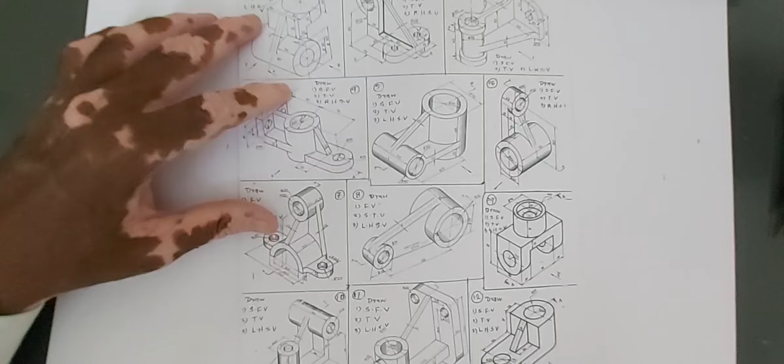Yes, today we will see this problem. This problem is mentioned in the book, so you can refer to the TechMax book or Techno book, Techno Knowledge book or Tech Knowledge publication book. This problem is available. So the question is: draw the sectional front view looking from X.

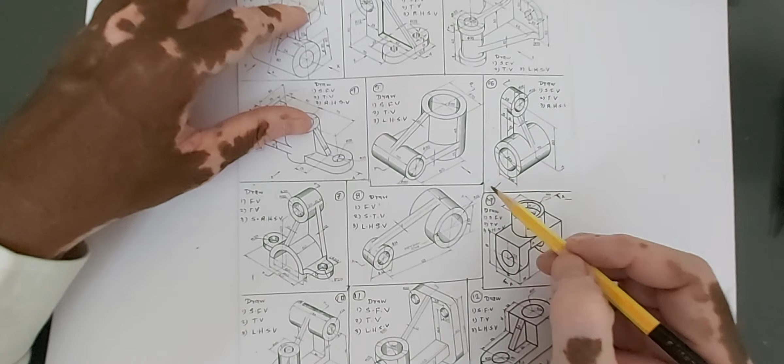Okay. After that this wall is visible, and this cylinder will look like a rectangle.

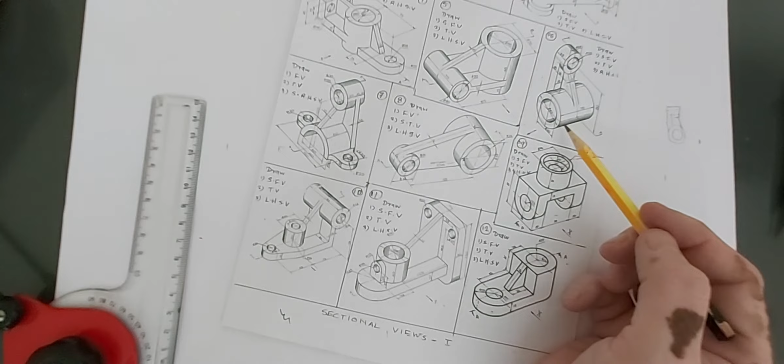According to the first angle method of projection, front view above the reference line, so this is the XY line, front view above the reference line, top view below the reference line, and right hand side view on the left hand side of the front view. Question is draw sectional front view, top view and right hand side view. So right hand side view will be on the left hand side of the front view. So this is the front view.

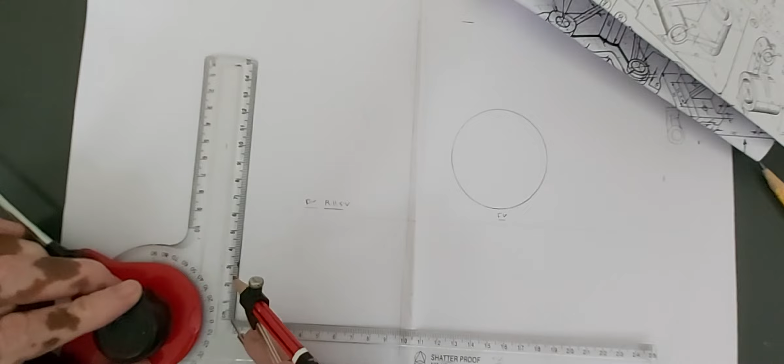So first we have to draw these two circles, one diameter 60, another diameter 40. So this circle of diameter 60 and internal circle diameter is 40. So diameter 60 means radius 30. First I will draw a circle like this. And internal circle of diameter 40 means radius 20. So this radius 20.

Whenever the circle comes, you have to draw a center line: one long dash, one short dash, one long dash, one short dash. Then after that, from this center to this center height is 80 millimeter. So from this center I took 80 millimeter upward. Draw center line like one long dash, one short dash.

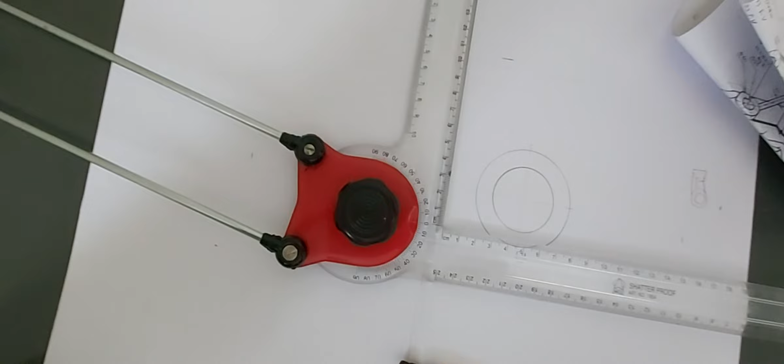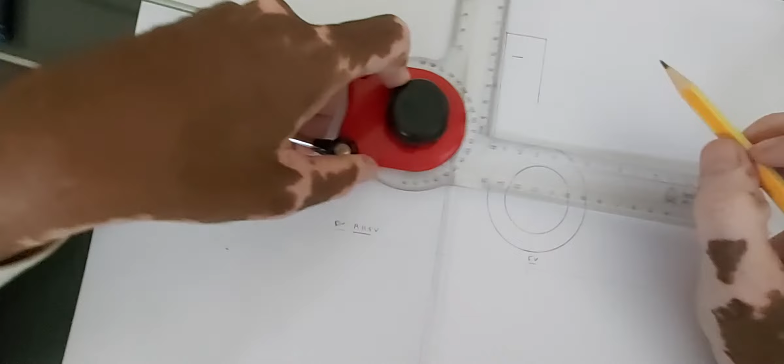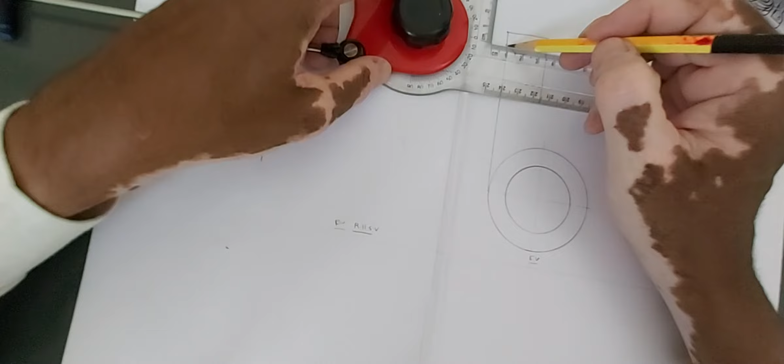Then cylinder of radius 20. So radius 20 means 20 mm below and 20 mm above, like this. So this is the wall, and this width is 25. Cylinder width is 25. So this 25 and 20 mm below, 20 mm above, like this, and in this there is a circular hole of diameter 24. Diameter 24 means radius 12, so 12 mm below, 12 mm above, like this. And this wall is of 15 millimeter.

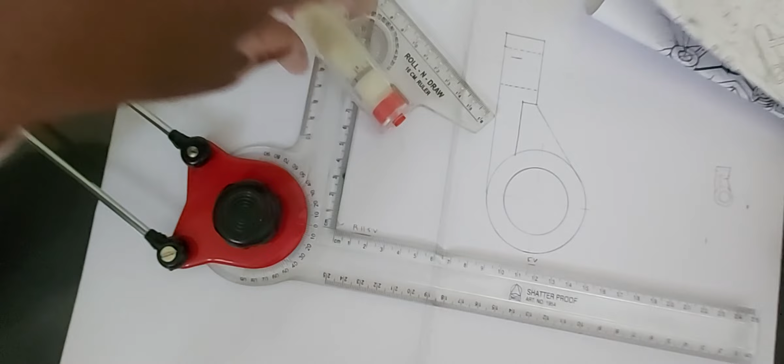And there is a rib like this, tangential to the cylinder. But we have to draw the sectional front view.

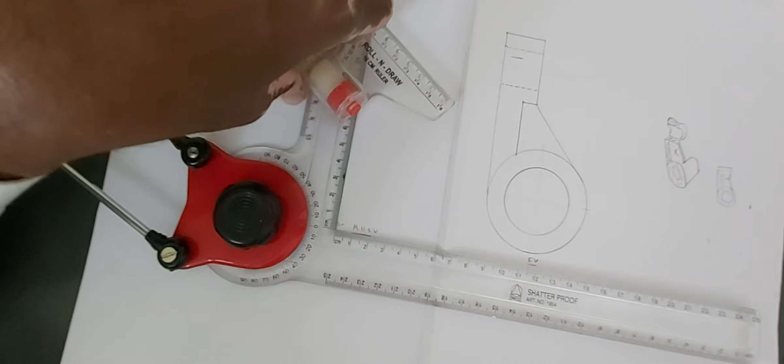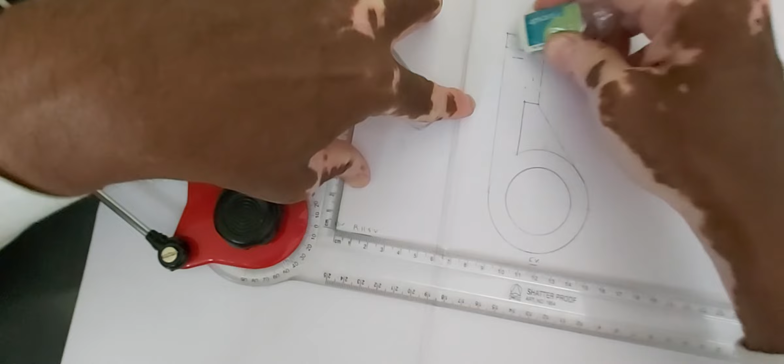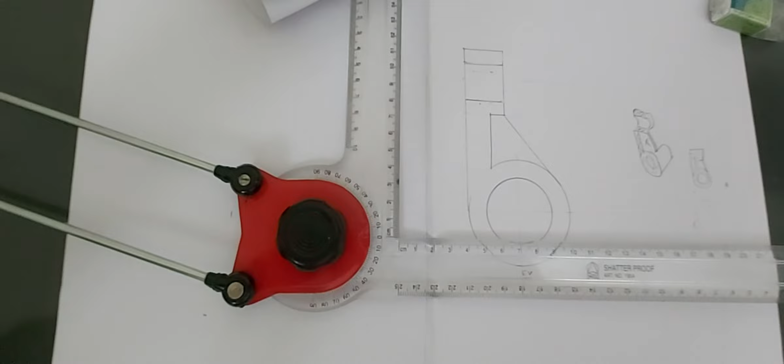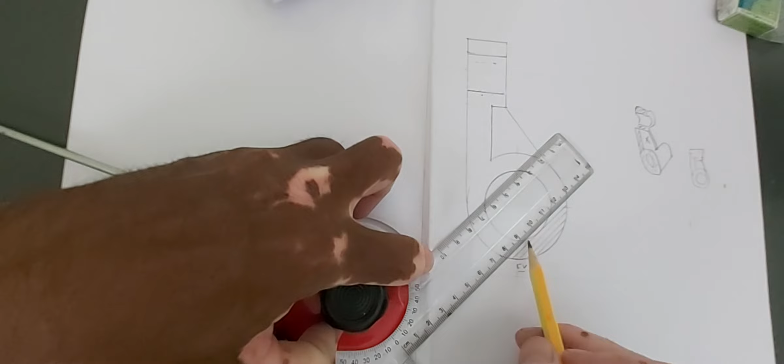This hidden becomes continuous, this hidden becomes continuous, and in the cut portion we have to draw section lines inclined at 45 degree, gap 1 to 2 mm, and it should be uniform. So 0 degree and we made it 45 degree, and draw section lines inclined at 45 degree, gap 1 to 2 mm, and uniform. Okay, so this section line inclined at 45 degree, gap 1 to 2 mm.

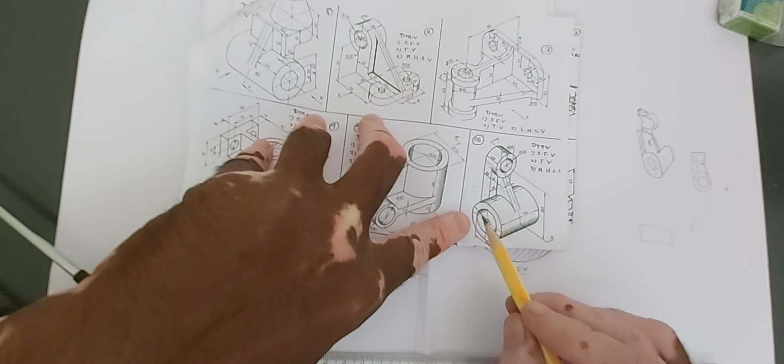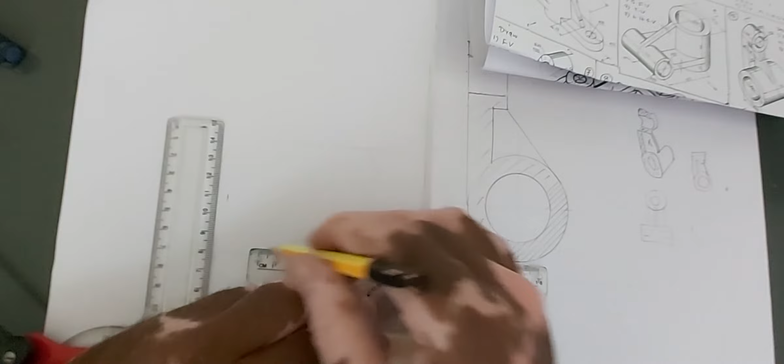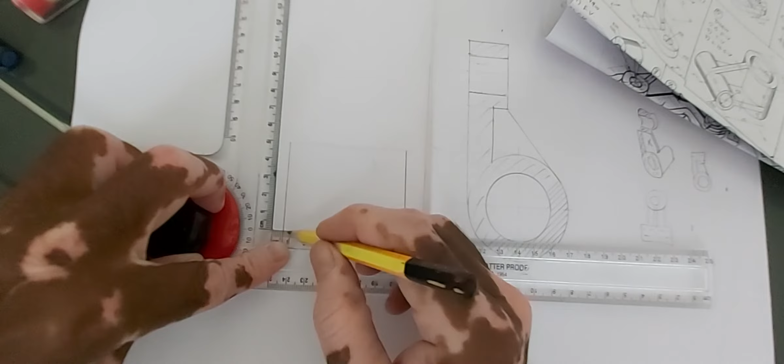So the side view contains width and height. So height will be projected from front. So cylinder height this much, that is 60, will be projected from front, and width is given to us. This 70. So take 70 mm, this. In this there is a circular hole that is invisible. So invisible means hidden line, dotted line you have to draw. This hidden line, center line, and this hidden line. Okay.

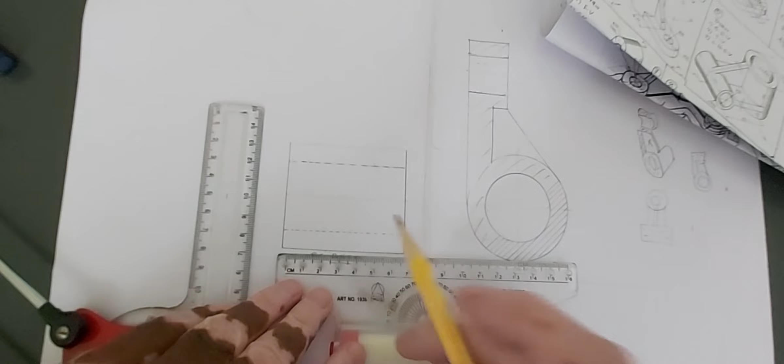Next, take this midpoint that is 35, draw center line here, that is cutting plane also, and project this center line from front, so you will get center here.

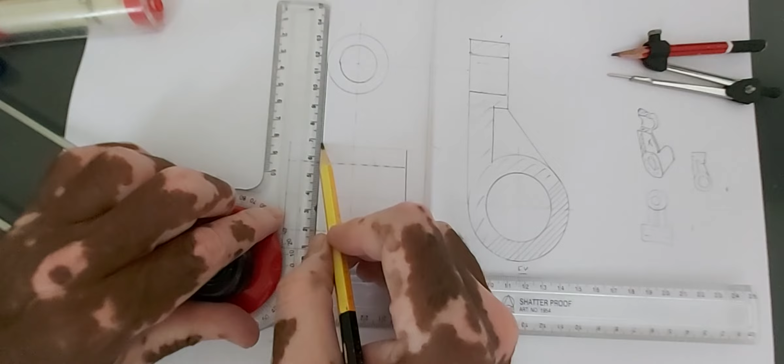Okay, then this wall visible, then invisible, this wall visible, then invisible. Why it is invisible? Because this wall is penetrating to this cylinder, so that wall is on the backside of this cylinder, that's why it is invisible.

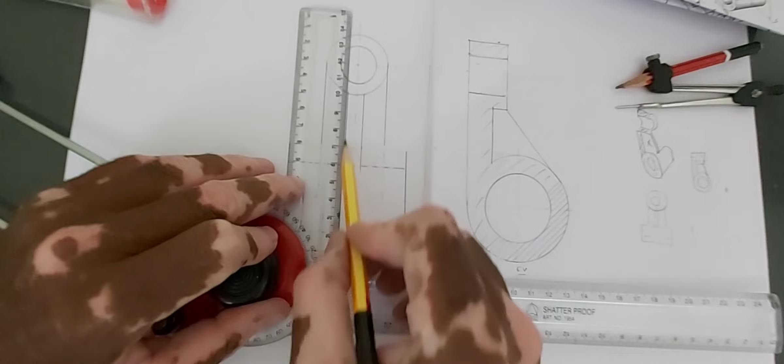Then this rib's width is 10 millimeter, so 5mm on the right side of the center line and 5mm on the left hand side of the center line. This rib is also penetrating to the cylinder up to the tangent point, so at this tangent point, make a slight curve here and darken the cylinder.

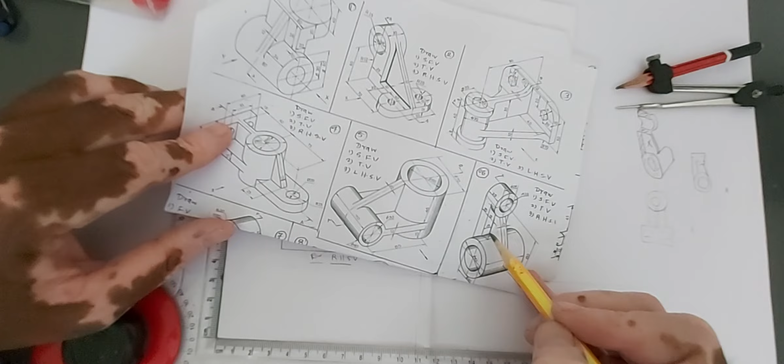One more thing, this is the surface of the cylinder, this edge similarly on the right hand side, due to this surface of the cylinder that is invisible. So how it will be made? Project this point, that is invisible like this.

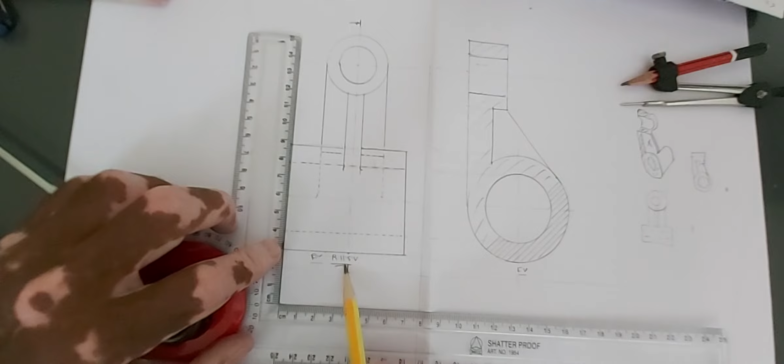Okay, and cutting plane symbol looks like a center line, ends are dark, and cutting plane direction from right hand side is left to right, left to right. So draw an arrow here, left to right, this left to right. So this is sectional front view and side view.

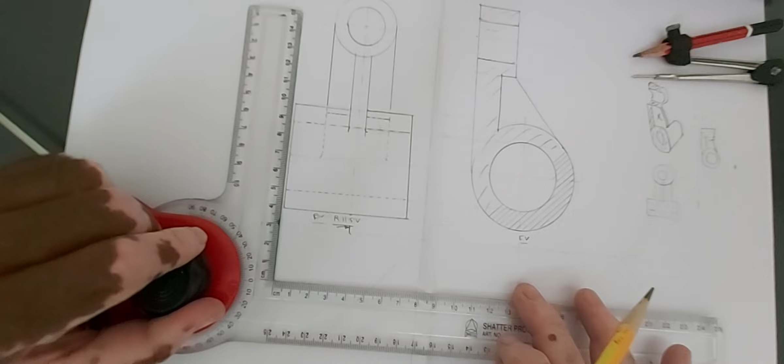Similarly top view, so to draw top view we have to draw a 45-degree line here, 45-degree. So when you will see from top, this cylinder will look like a rectangle.

In this there is a circular hole which is invisible. Then this bigger cylinder will look like a rectangle. In this there is a circular hole which is invisible.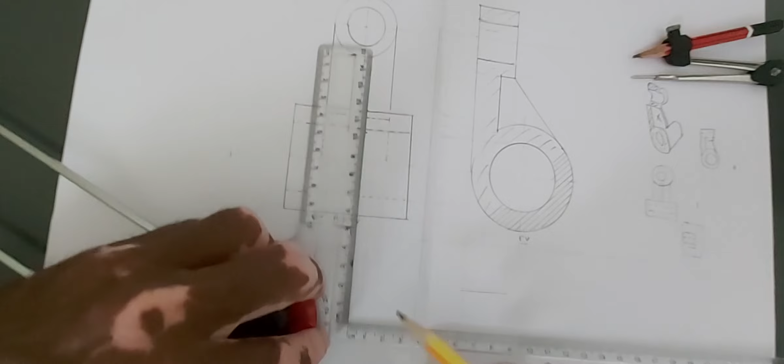In this there is a circular hole of diameter 24. So project this diameter 24, that is invisible. This diameter 24, that is invisible, and this cylinder will be like this. Okay, now project this center line, one long dash, one short dash, one long dash, one short.

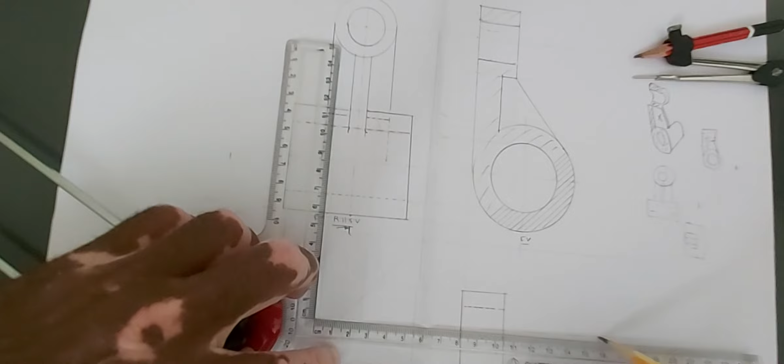Now second cylinder of diameter 60, so this 60 and width is 70 will be projected from side. Will be projected from side. Where this intersects this 45 line, that point is to be projected.

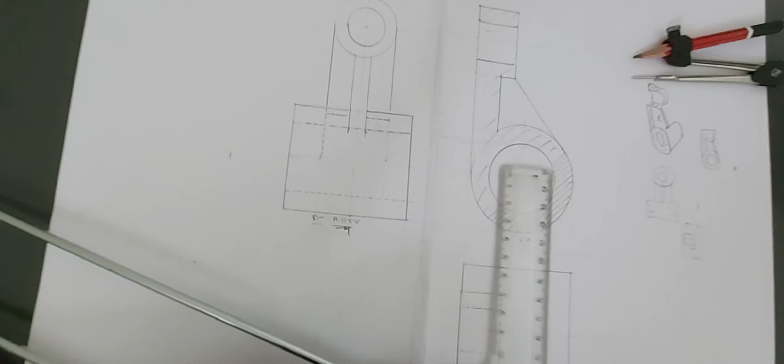So this bigger cylinder, in this there is a circular hole that is invisible. So dotted, this circular hole invisible, that is dotted.

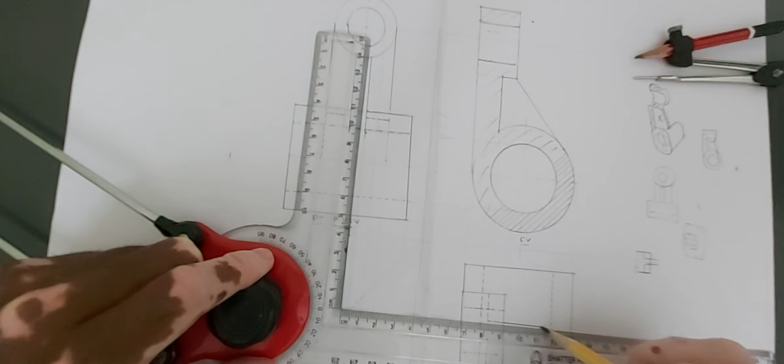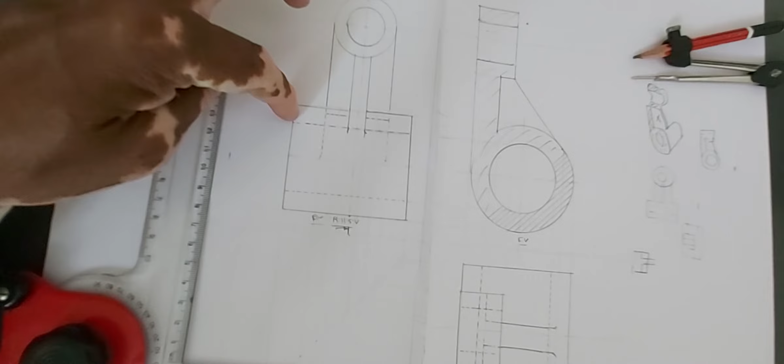Up to where? Up to the tangent point. We call the tangent point the projection symbol. So this is the sectional front view, top view and right hand side view.

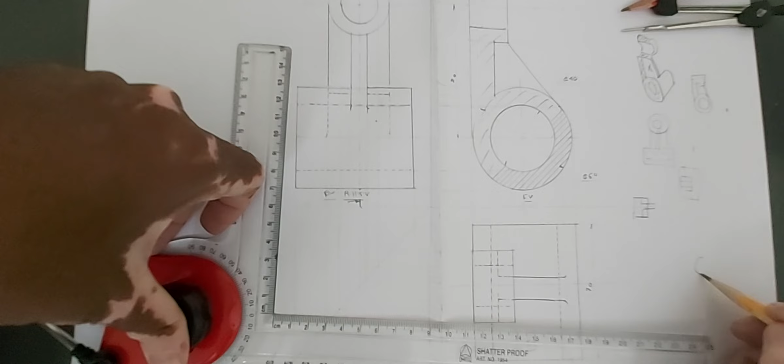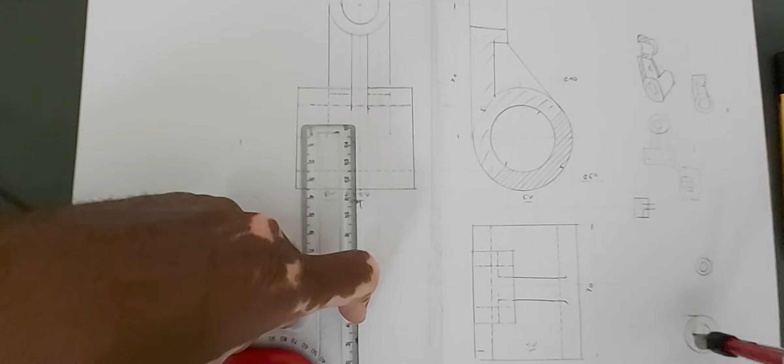Symbol: two circles, one diameter equal to - I draw with scale - one diameter equal to 20 means 10 radius. And another diameter equal to 10 means 5 radius. So this circle and this center line, one long dash, one short dash, this one long dash, one short dash.

Project the circle towards left side, leaving a small 5mm projection, and draw the frustum. Keep this distance 20 and join like this. Okay, so this is the symbol of first angle method.